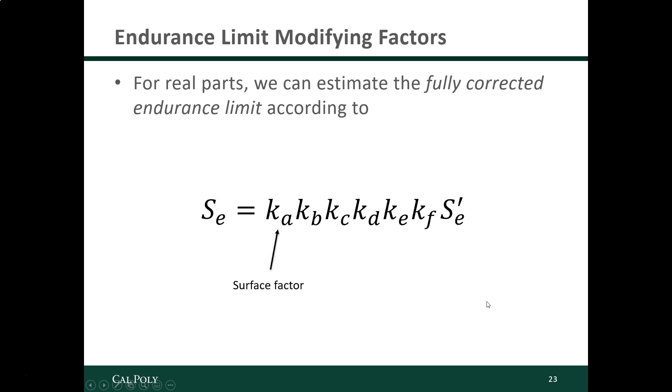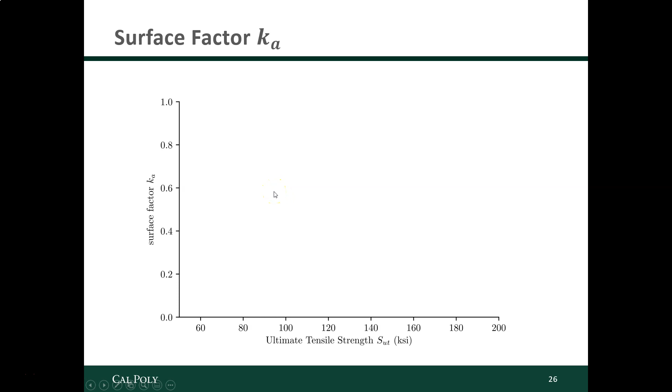If it's perfectly polished, just like a test specimen is, then the surface factor Ka will be 1 across the board. It doesn't matter what the ultimate tensile strength is. Compared to a perfect specimen, well, it has the same condition of a perfect specimen. If it has a mirror polish, then we do not need to reduce the endurance strength by any factor. But if, say, it were ground finish and it weren't perfectly polished, then you'd get a different sort of curve. For a lower ultimate tensile strength material, it turns out you have a factor that's very close to 1.

As the steel gets stronger and stronger, stronger steels tend to be a little bit more brittle, right? A little bit less forgiving of cracks, especially near the surface. And so if you have a ground finish, it's a little bit less pristine. You could have tiny micro cracks, little imperfections that turn into big cracks as you apply cyclic loads. They open up over time and eventually the whole material fails. And so that's why when you've got a less than perfect finish, especially with less forgiving steel, you end up with a lower surface factor and a lower endurance limit as a result.

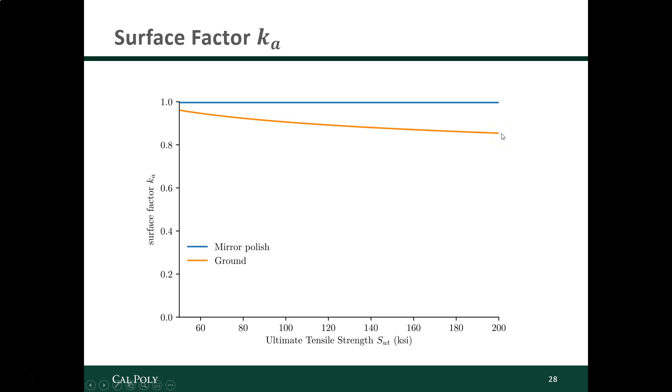If you have even worse conditions in your steel, if it's just machined, say like on the lathe, or if it's been cold drawn, if it's hot rolled, even lower. If it's just forged, then it's even worse, right? And so if you've got these really strong steels and the surface finish is really poor, you could end up with only 20% of the endurance limit that that same steel would have if it had a perfectly polished finish. So it's really important, if you need a good fatigue strength for your part, to make sure that the surface of the part is nice and shiny, because any imperfections from your manufacturing process cause cracks, and those cracks grow over time when it's subject to load, and that's what you want to avoid.

So it turns out that these curves can all be approximated with a few constants. Our surface factor Ka is given by some A. This is different from that A. It's a constant times SUT, the ultimate tensile strength, to the bth power, where A and B are given in table 6-2 of the Shigley book.

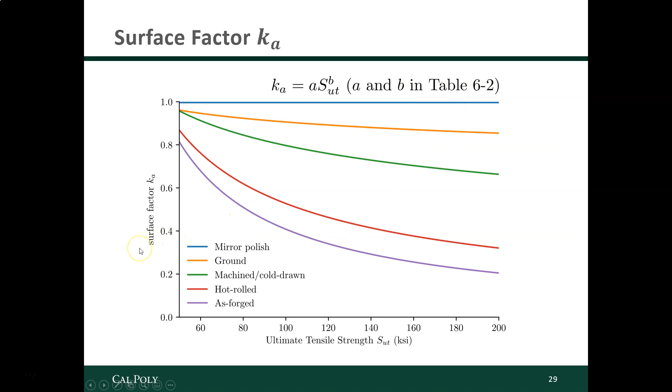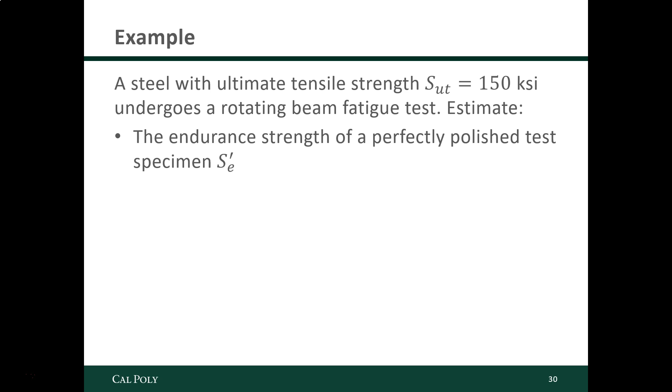So let's do an example. A steel that has an ultimate tensile strength of 150 KSI undergoes a rotating beam fatigue test. First we're going to estimate the endurance strength of a perfectly polished test specimen, SE prime. And then, considering that the surface might not be perfectly polished, let's say we forgot to polish our test specimen, what would we expect the endurance strength of a machined specimen to be? So here's just the information directly from the Shigley book. Let's write down a little bit of information about our problem.

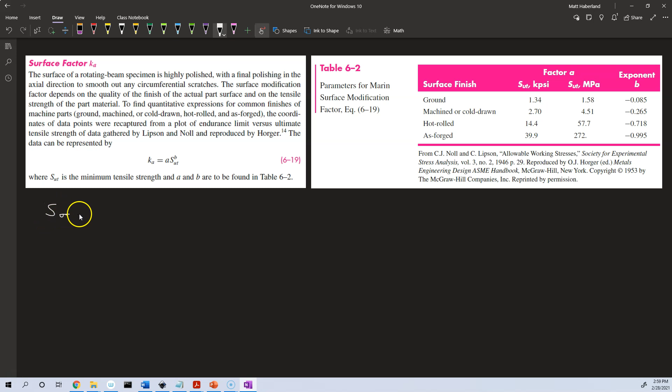SUT for our steel is 150 KSI. And the first thing that we wanted to know, what is SE prime? What is the endurance limit of a perfectly polished specimen? All that we're given is the ultimate tensile strength of the steel. We've already covered in earlier parts of the preparation that we can estimate the endurance limit of a perfectly polished specimen as 0.5 times the ultimate tensile strength of the material. So in our case, we have 75 KSI is what we'd expect our specimen to survive for an infinite number of cycles. That was the first part of the problem.

And the second part was, what if it were machined but not polished? So we wanted to find out the endurance strength of our real part, which is really just a test specimen, but it's not polished, when we modify it by the surface factor Ka. And all these other factors that we could have, Kb, etc., are all 1, because we have all the other conditions of a specimen except for the surface finish, times Se prime. Ka is equal to A times ultimate tensile strength to the bth power, where A and B are given in this table. And we have a machined part, machined or cold drawn.

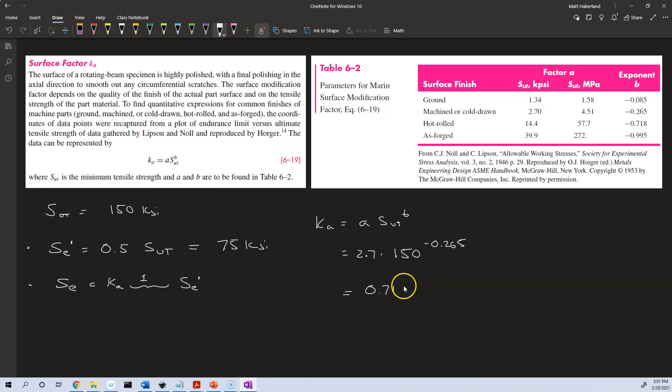You've got a different number that you need to put in here, whether you're talking about KSI or megapascals. For KSI, our factor A for machined or cold drawn is going to be 2.7. And we have our SUT, 150 KSI, to the bth power. It doesn't matter whether we're talking about units of KSI or megapascals for B. Our exponent B for machined finish is negative 0.265. And we find 0.7156. So the endurance limit of our real part is going to be about 71.56% of the endurance limit of a perfectly polished specimen. Just because we didn't polish it, we get a 30% reduction in its endurance limit.

So we have 53.67 KSI. And we're going to have a bunch of other factors to keep in mind, right? The temperature, the size, all these different things we said were 1 right now, for real parts they're going to be less than 1. So we're going to end up with additional reductions in the strength of real parts.